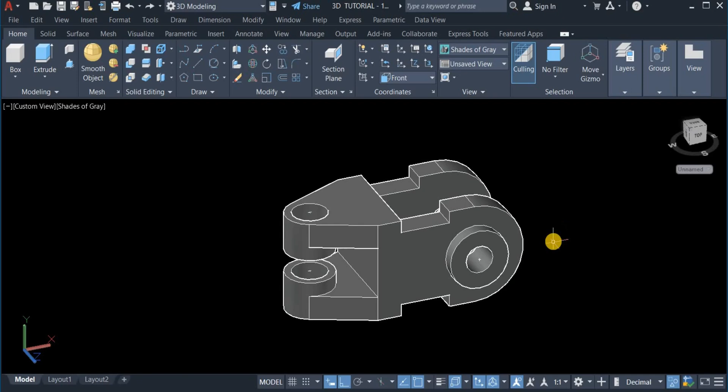So here I have a 3D mechanical component you can practice with as a beginner, and at the end of this tutorial you will have learned how to use some basic commands like Presspull, Extrude, Offset, Trim, and some other commands on the modeling panel, solid editing panel, and modify panel. So without wasting much time, I'm going to walk you through step by step on how I designed this component using these dimensions and commands. Let's now get started.

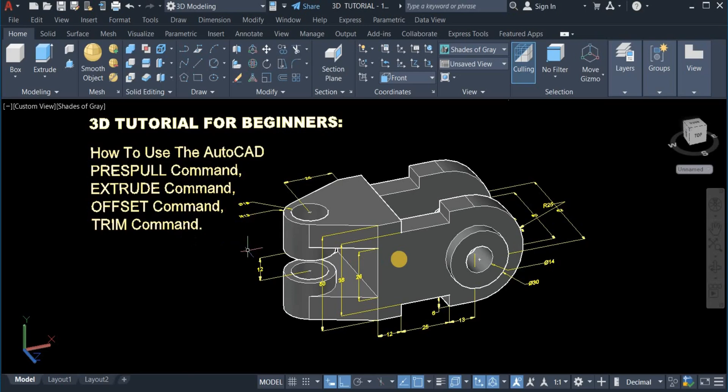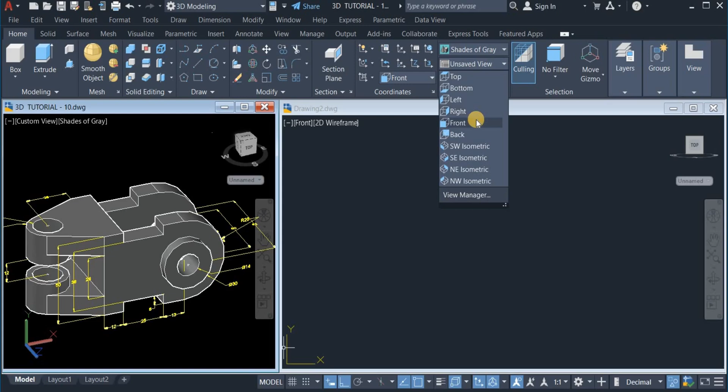Okay, so here is a new page, and here I have to set up my workspace. Come down to the status bar, click on this star icon and choose 3D modeling, and also switch the view to front to start the drawing. Click on front view, and again switch this one also to front view. Click here and also choose front view.

So I'm going to start the drawing from this front view. Now you can see that the height of this object is 50, and also from this edge to the center of this circle is as well 50. That is 12 plus 25 plus 13, that's also 50. So I will start by drawing a square of 50 by 50.

So come to the draw panel, click on the rectangle command and draw a square of 50 by 50. Okay, you can zoom in on this. You can also see that the distance here from this edge to this portion is 12. So what I'll do here is to explode this square. Click on the explode command, come to the modify panel and click on explode, then explode this square.

Then offset this line by 12 to the right. Come to the modify panel, click on offset command, enter 12 and offset this line to the right. Okay, and again offset this line by 25 to the right. Enter 25 and offset this again to the right.

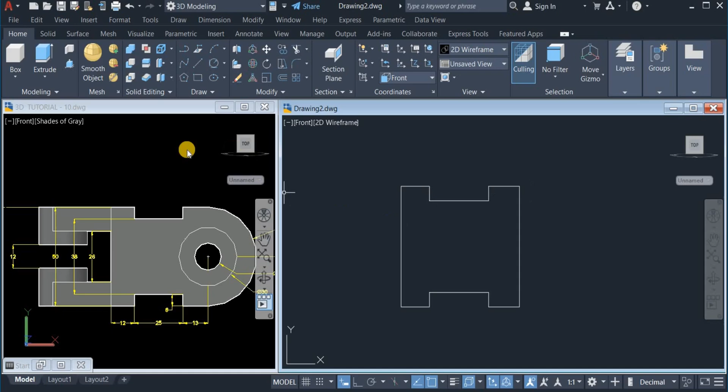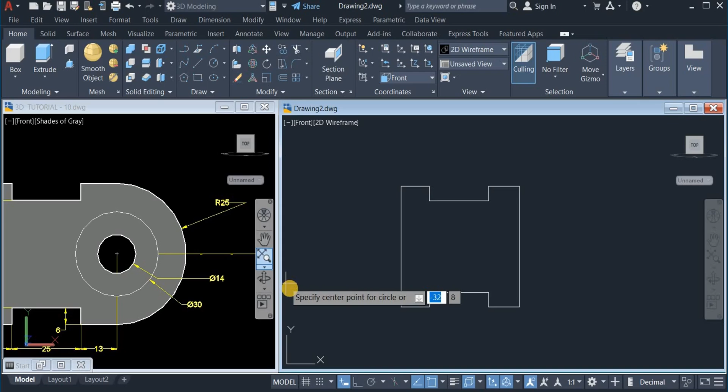Okay, so the radius of this arc is 25. So I'll draw a circle of 25 radius here at the center. Come to the draw panel, click on this arrow and choose center radius. Locate this midpoint and draw a circle of radius 25.

Enter 25. Okay, so I will draw yet another circle of diameter 30. Click on the circle command again, choose center diameter this time, locate the midpoint and enter 30. And draw yet another circle of diameter 14. Click again on the circle command, choose center diameter. From here at the center, draw a circle of 14 diameter.

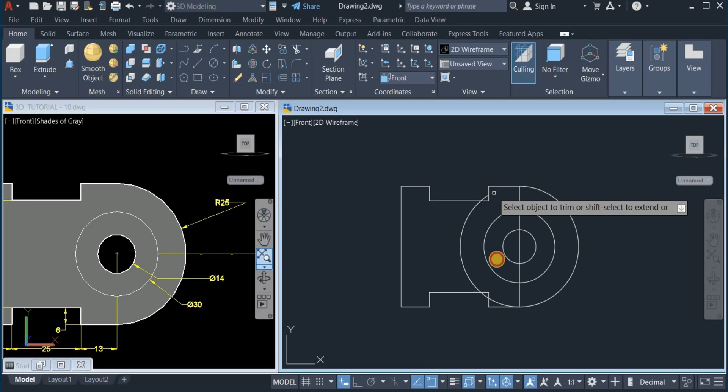Okay, so I will now use the trim command to trim out some portions. Come to the modify panel, click on trim, trim out this. Okay, so trim out this. Then use the join command to join them up. Come to the modify panel, click and choose join, then join the whole of this.

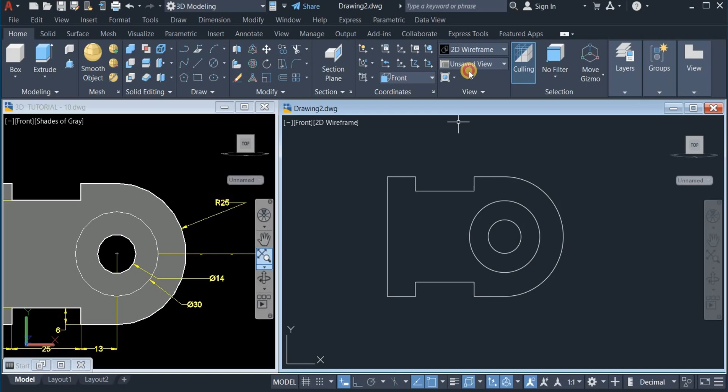Alright, so I will now switch the view to isometric view. Come to the view panel, click here and choose southwest isometric. Okay, also switch this as well to southwest isometric.

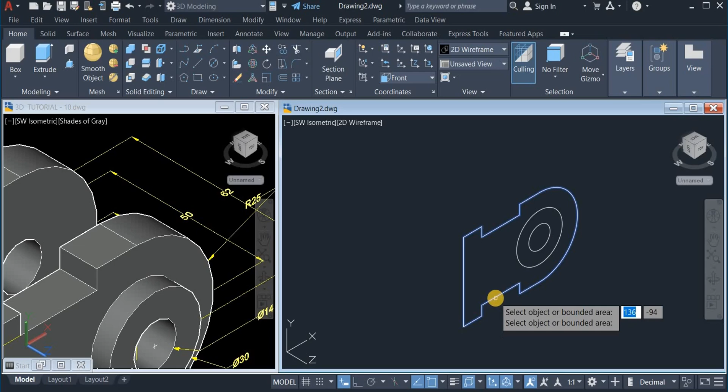Okay, so next I'm going to offset this face to a distance of 50, which is this. Offset this face to a distance of 50. Come to the modeling panel, click on offset command, click on this face, click on this, and pull back by 50 units. Okay, exit this command.

Okay, so now I will mirror these two circles to this other side, but before then I will have to switch the UCS to top position. Come to the coordinate panel, click here and choose top. Now click on the mirror command and mirror these two circles. Come to the modify panel, click and choose mirror. Now click on these two circles and locate any of the midpoints of this object and mirror to the left. You can switch the ortho mode to keep that steady and enter.

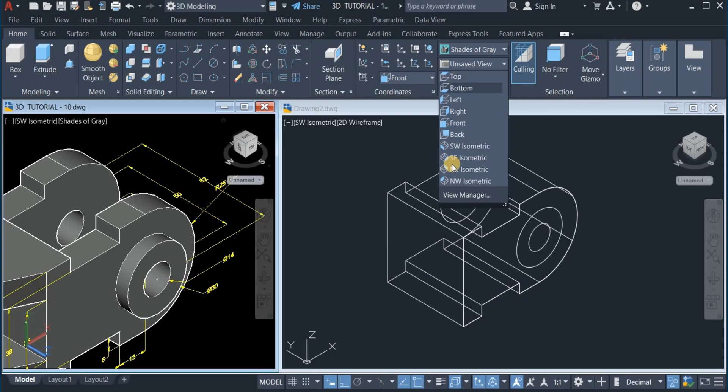So now switch this face to top. You can see that the distance from this edge to this edge is 50, and from this edge to this edge is 62. So from this edge to this portion now is going to be 6.

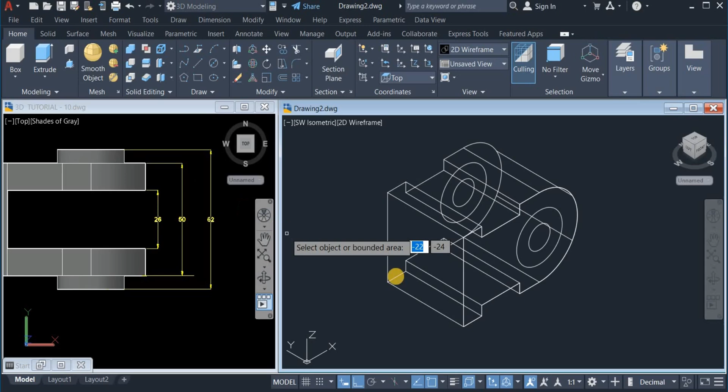So what I'll do here is to offset this face out to a distance of 6. Click on the offset command, click on this face and pull out by 6. Exit, turn around, and also pull out this face by 6. Click on the Presspull command, click in between the two circles and pull out by 6.

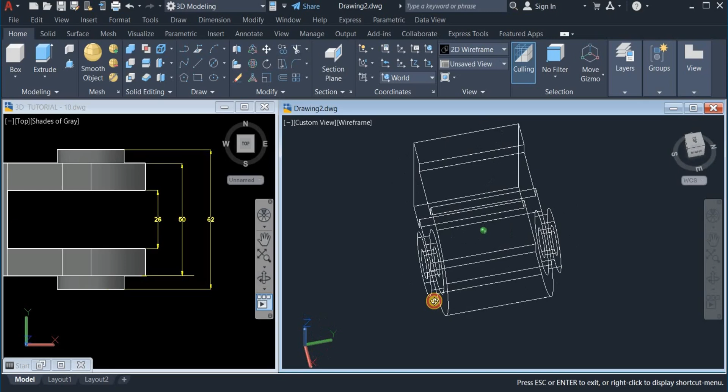So let's return to Southwest isometric. Alright, so what I have, let's see how that looks like in shade of grey.

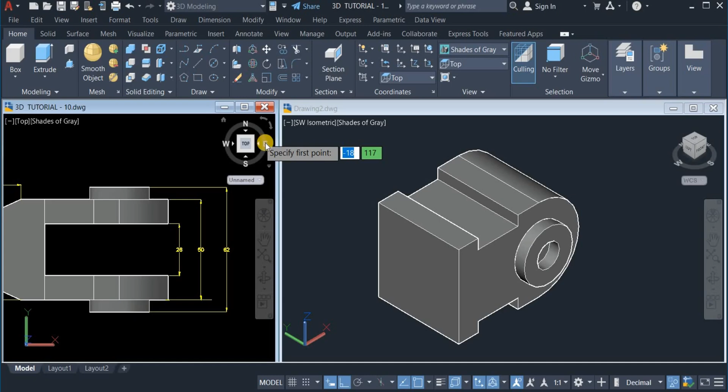So again, I have to create this slot here. You can see that the gap is 26. So what I'll do is draw a line. Click on line command and draw a line from this midpoint. Look at the midpoint of this object here, and draw a line out.

So now I'll have to offset this line again by 13 on both sides. Come to the modify panel and click on offset command and enter 13. Then offset this to the left and also to the right.

Now remove this middle line. Then close up the end. Close up this end. And also draw a line to close up this end. Click on line command, and also close up this end as well.

So again, use the join command to join up all these lines. Come to the modify panel, click and choose join. And join these lines, including this.

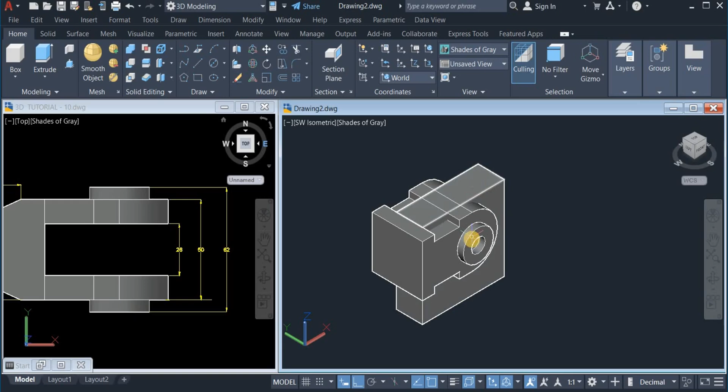So I will now use the Presspull command to pull this out. Come to the modeling panel, click on Presspull, then pull this down. Then use the solid subtract command to subtract this from this. Come to the solid editing panel, click on solid subtract, click on this, then subtract this.

Okay, now remove this construction line. Now switch this view again back to southwest isometric.

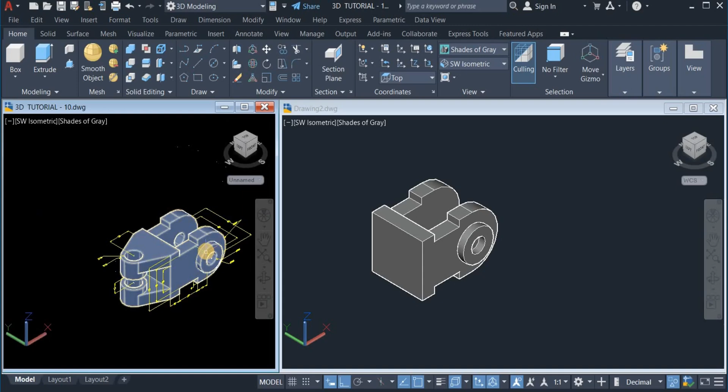Okay, so now I'll have to draw this circle here. You can see that the distance from this edge to the center of the circle is 25. So what I'll do is draw a circle of diameter 18 at the midpoint of this object. Come to the draw panel, click here and choose center diameter, look at the midpoint of this object, and draw a circle of diameter 18.

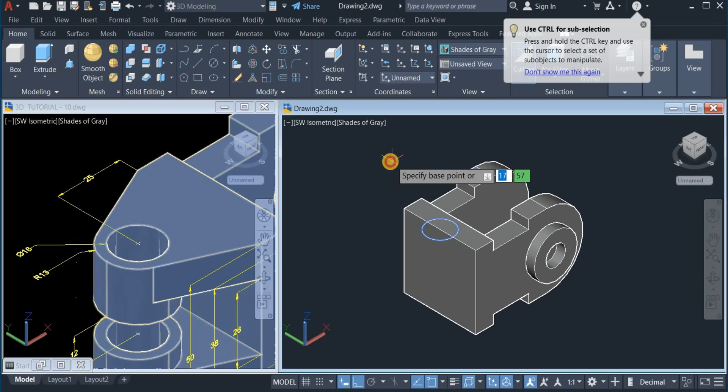Then click on the move command and move it out by 25. Click on the move command, click on the circle, enter, and move it out by 25.

Right, so I'll draw yet another circle of radius 13. Come to the draw panel again, click on this arrow and choose center radius. Locate the center of this circle and draw another circle of radius 13. Enter 13.

So now I'll draw a line from this point to the tangent point of this circle. Click on the line command, click at this point, then locate the tangent point of this circle. That's the tangent, enter.

Now I can mirror this line to the other side. I'll repeat the process here, but choose mirror. Click here and click on mirror. Mirror the line, locate the midpoint, enter, and exit.

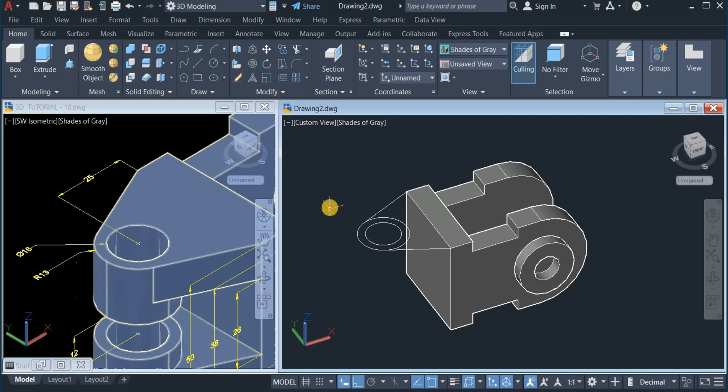So I'll now use the Presspull command to pull this down to a distance of 50, from here to here. Come to the modeling panel, click on Presspull, and click in between this and pull down by 50. Exit this command. Also pull this, click in here, and also pull down by 50. Exit this command.

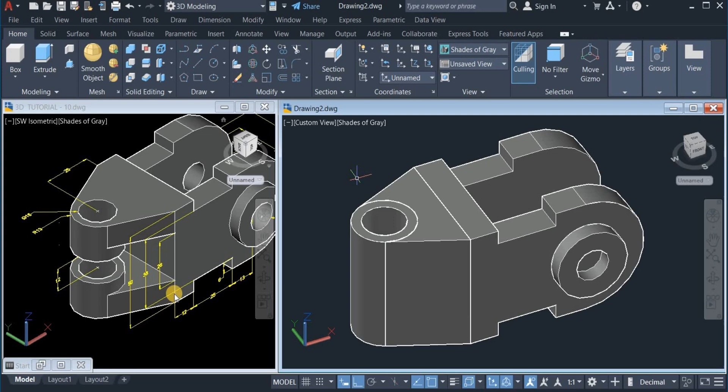So again, I have to create this slot here, and the gap here is 26. So what I'll do is draw a line, and terminate it right here. Exit. Now I'll offset this line by 13 on both sides.

Let's offset this line by 13 upwards and also downwards. Click on the offset command, enter 13, and offset this downward and also offset it upward. Now delete this.

And close up these two ends. Click on the line command again. Close up these two ends. Enter. Also click on the line command and close up these two ends.

Now use the join command to join them up. Join these lines.

So I will now use the Presspull command to pull this out. Click on the Presspull command. Click on this and press pull out.

Now use the solid subtract command to subtract this from this. Come to the solid editing panel and click on solid subtract. Then click on this. Enter, then subtract this. And delete this one now.

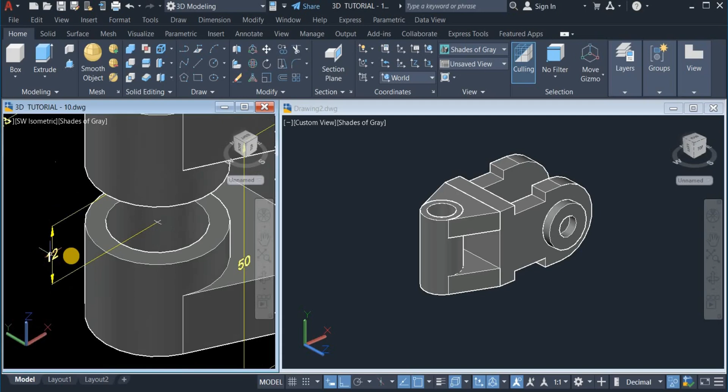Right, so again I'm also going to create this gap here, this opening, and the gap here is 12. So again, I'm going to draw another line from this point. Click on line command, locate this midpoint again, and draw a line.

Okay, now this time offset this line by 6 on both sides. Click on offset command, click on this line, click on offset and enter 6. Then click on this line, move upward and also move it downward. Enter. Now remove this mid line.

Close up this. Close this up. Enter. And also close this end up. Click on the line command again and close up this end. Use the join command again to join them up.

Okay, so again, use the Presspull command to pull it out. Click on the Presspull command, click on this, and pull it out. Now use the solid subtract command again. Click on solid subtract, click on this, and subtract this. Now remove this construction line.

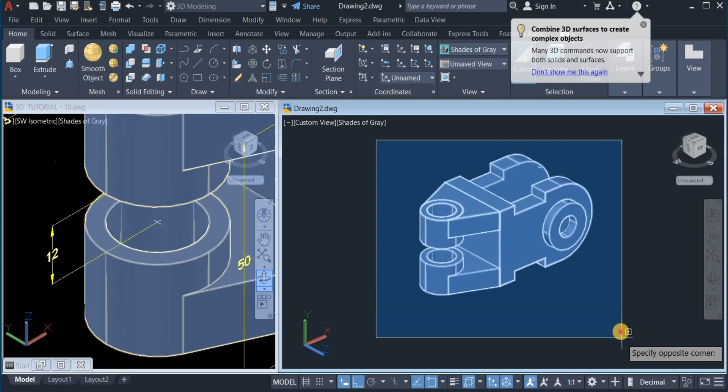So now use the union command to join them all up. Come to the solid editing panel and click on union. Now highlight the whole of this. Enter. Click on this, move it aside. And remove all construction lines.

Okay, so here's the drawing. So again I have to press pull this out. Click on the Presspull command again. Click right in here and pull out.

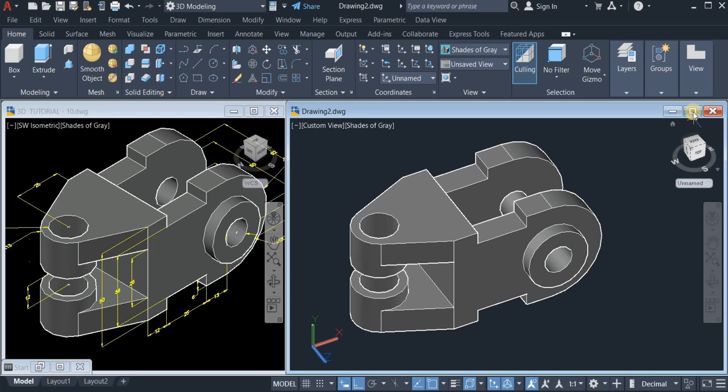Okay, so let's see how that looks like. Okay, so I now switch to full page. Alright, so here is the drawing now completed.